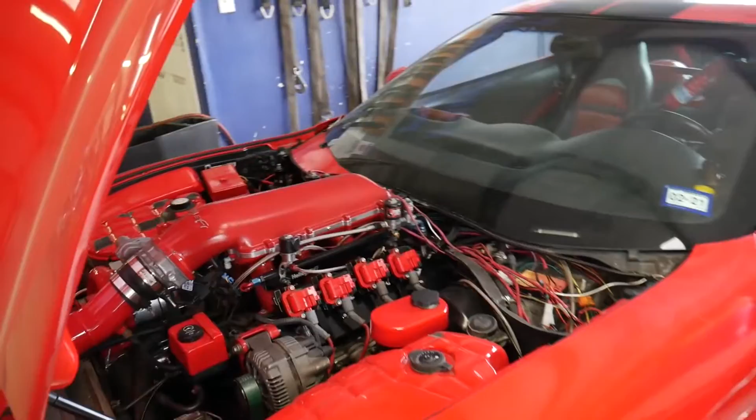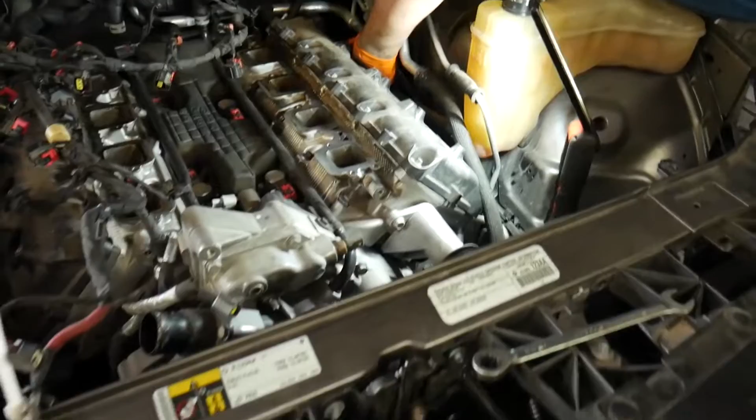That Charger RT, we're about to do a cam package on it. So as soon as it gets in here, I'll film that car and show you guys what kind of goodies it's getting. John's been making good progress on the cam install on the Hemi. Got the radiator out, intake off, just getting the valve covers off, and getting ready to pull the heads on this thing soon. Then we'll get the front cover off and get the old cam and lifters out of there and get ready to put in the new stuff.

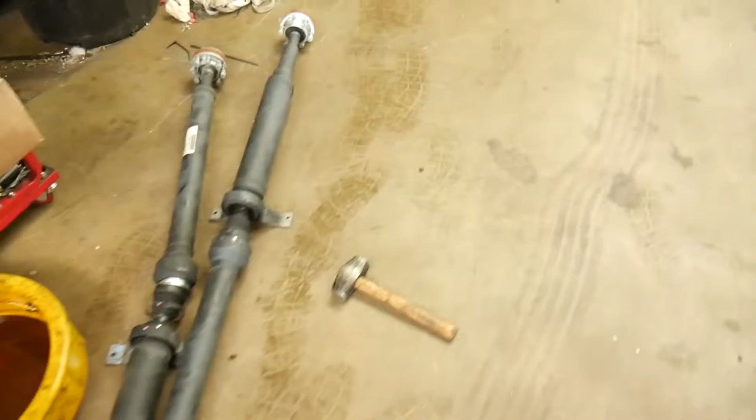Alright guys, the heads are off, the front cover's off, so we're at a good point for today. First thing in the morning, we're going to get the lifters out, get the new lifters in, get the cam out, get the new cam in, put our phaser limiter in, motor timed, get her all cleaned up, get the coolant out of places it don't need to be, get it all blown out, and get the valve springs put on the head and get this thing put back together.

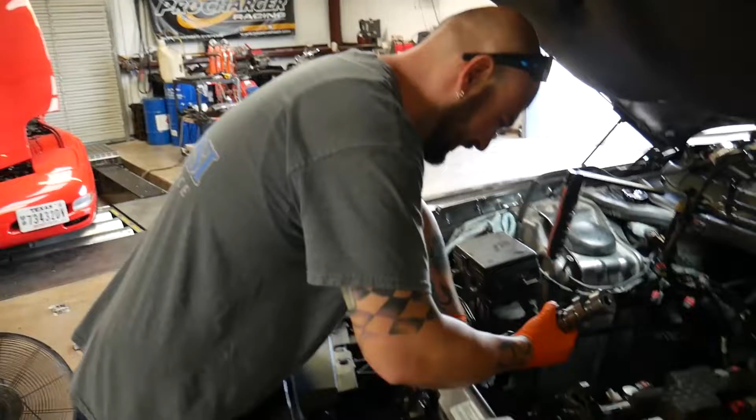You like the way I stroke the camshaft, John? Sometimes. Slide it in nice and even, nice and slow. You're pushing too hard - that's what she said. Sometimes.

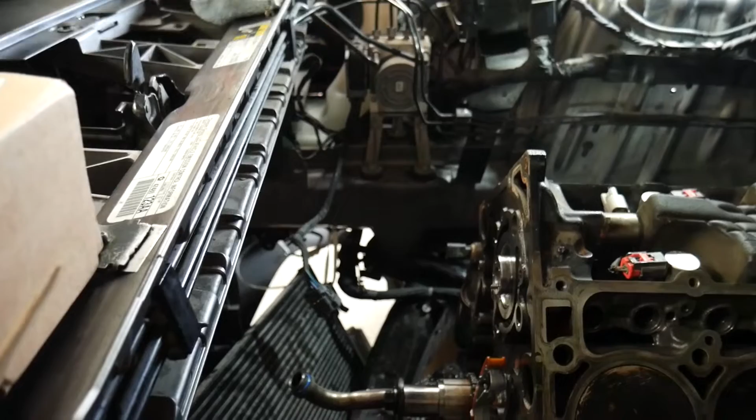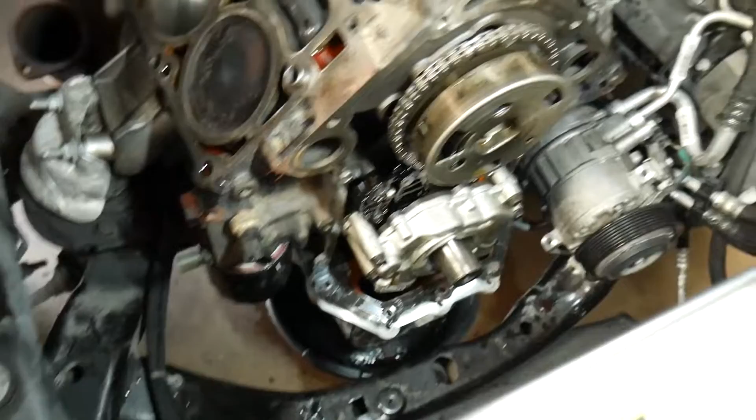So as you just seen, we put the cam in. We also got our new lifters in, and we got the motor timed. Oil pump back on, tensioner, all that jazz. So all that's good. All we got left to do is final cleanup, make sure all the bolt holes for the head bolts are clean. As of right now, the surfaces are clean, but the head bolts still got some coolant in them. So we're gonna get all those cleaned up, and then we'll slap the head gaskets on it and get these heads slapped back on it and start putting this joker back together.

So as you guys can see, the heads are back on. Sorry, I missed the shot for you guys. We went ahead and got the valve springs installed as well on the heads.

Once we get all the rest of the back stuff situated, we'll go ahead and get the intake on, get the coil packs on, and wrap up the front of the motor, get the radiator back in, and then tomorrow we'll hear this little 5.7 chop.

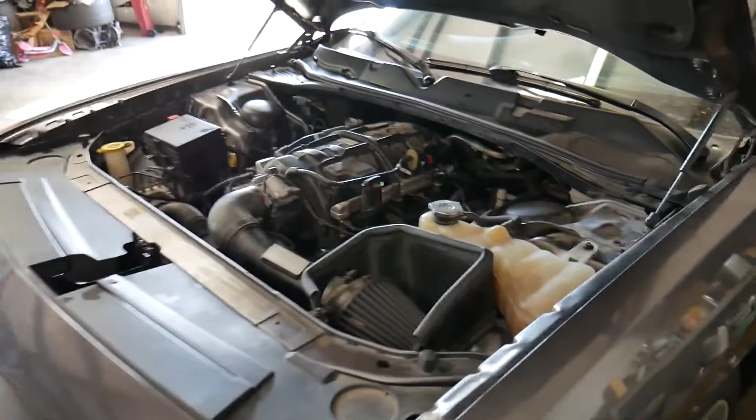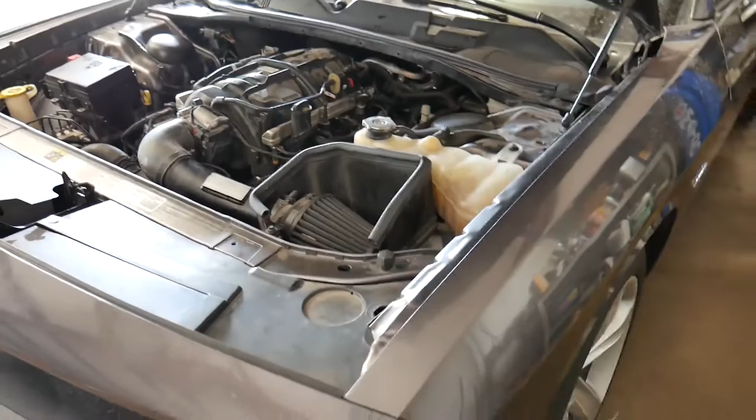So we've got the cam install finished up. We're gonna do the first fire up. I went ahead and got in the PCM and put a calibration in it. The only downfall, the shitty part, is the carrier bearing is going out on this car. So we're not even gonna risk it for the biscuit and put it on the dyno. We already contacted the customer and we're waiting to hear back from him, but most likely we'll be putting a drive shaft shop one-piece in it, or an OEM replacement. Who knows, we'll see here shortly, but let's go ahead and get the first fire up and see what this thing sounds like.

So as you guys heard, it's got a little chop to it, and it'll get a little bit more aggressive once we dial it in a little bit more, but I just threw a base map in it so we can get it fired up and get it out of the shop.

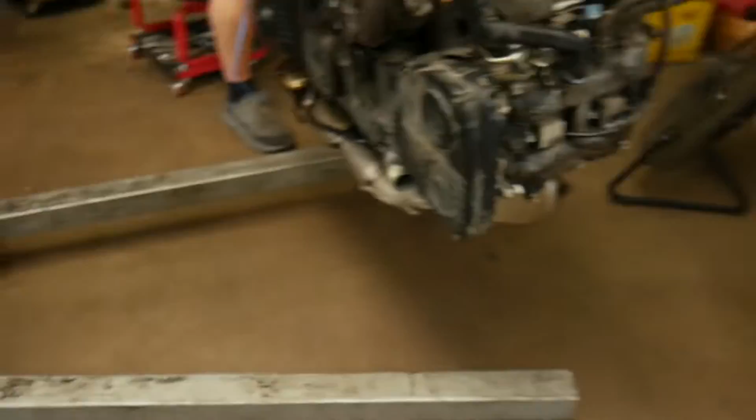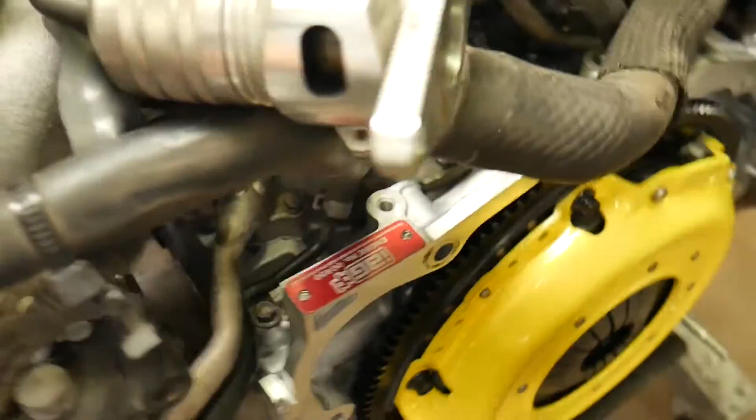So guys, we've been hard at it, and our Subaru build is finally ready to go back in. I didn't get a chance to do much filming, but John's got the Subaru motor ready to go back in. We got the new ACT clutch on there, that fresh IAG block. We went ahead and deleted the secondary air pumps as well, made some plates for that, but we're gonna go ahead and get this thing stuffed back in the chassis, get her put back together.

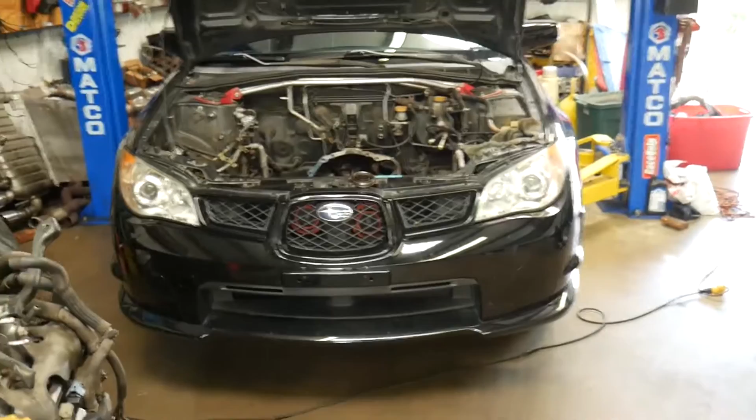So guys, on our cam install video, I think I'm gonna put, or as you've already seen, I put both these videos together, but we finally got the drive shaft shop drive shaft for this thing, 4 to 6 weeks later. This is the car that we put a cam in, and the carrier bearing on the factory drive shaft was no bueno, and on these cars you can't replace it. So we went ahead and talked to the customer about it and got an upgraded one-piece drive shaft put in this thing, and it came in yesterday, so we got it slapped in.

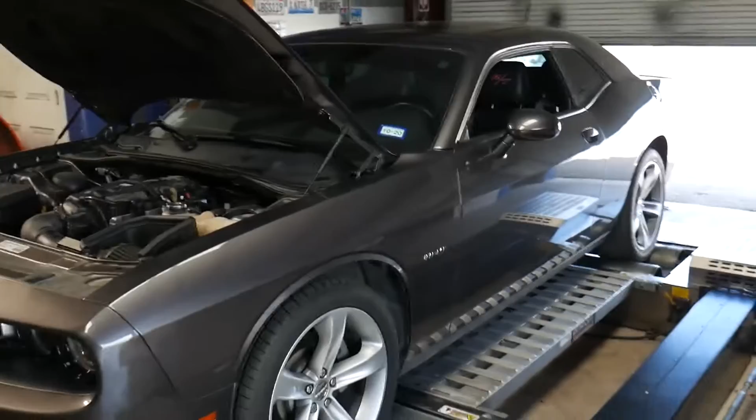So now we got this thing on the dyno. We'll go ahead and get this thing strapped down and get it tuned out and see what kind of power it makes.

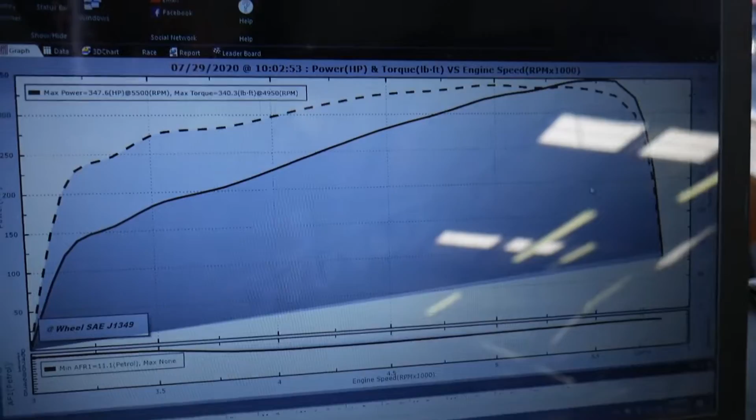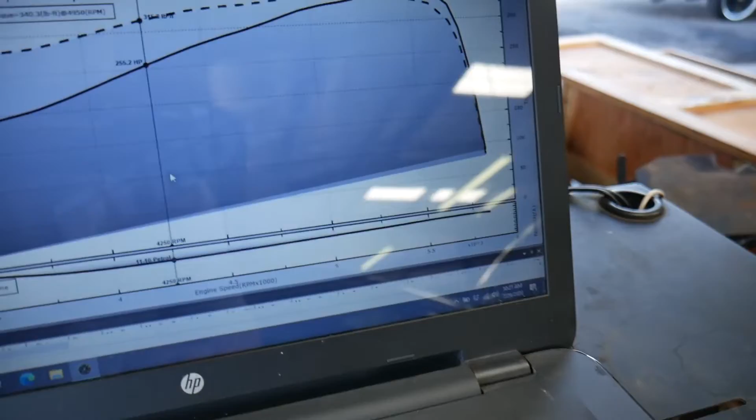Alright guys, so we got our first lick in there, and well, definitely that's a starting point. That first pull there was 347 horsepower and 340 foot-pounds of torque. And as you can see, we got quite a bit of work to do. The air fuel line's pretty flat, but she's definitely fat down here at the bottom. So we're gonna get these air fuels cleaned up and get some more things tidied up on her and see what kind of gains we make.

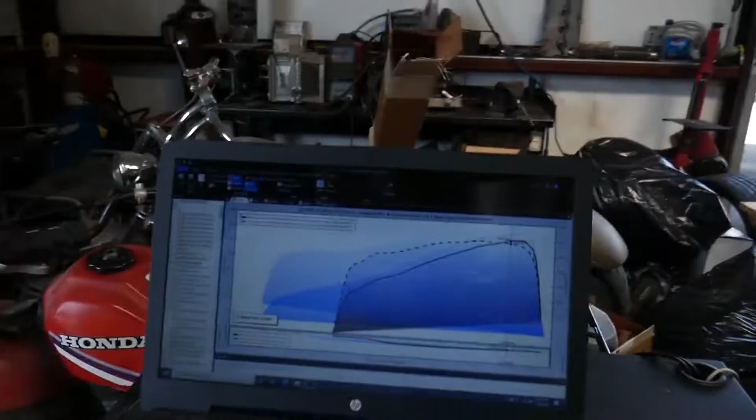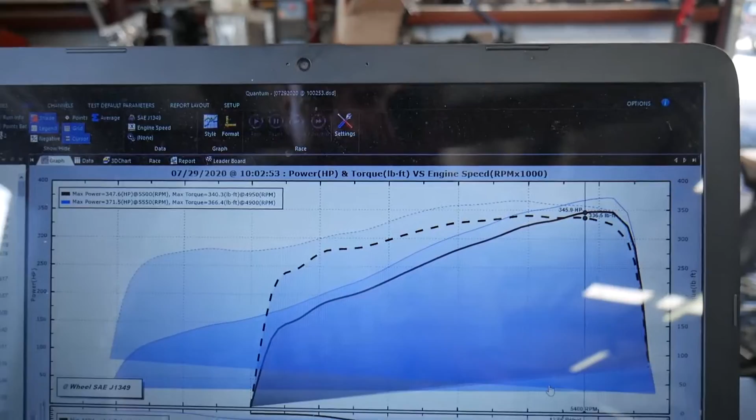Well, she liked it. She liked those changes for sure. So that second pull, 371 horsepower, 366 foot-pounds of torque, and you can see gains through the entire curve there. Let's get some out.

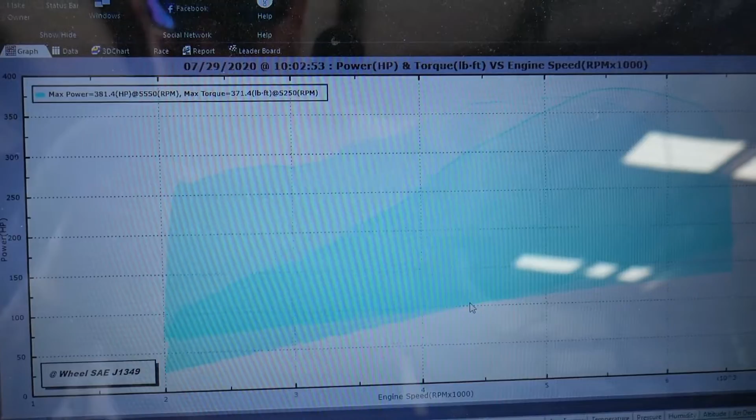Alright guys, that's our final tug on the 15 Challenger RT that we did the camshaft in. 381 horsepower and 371 foot-pounds of torque.

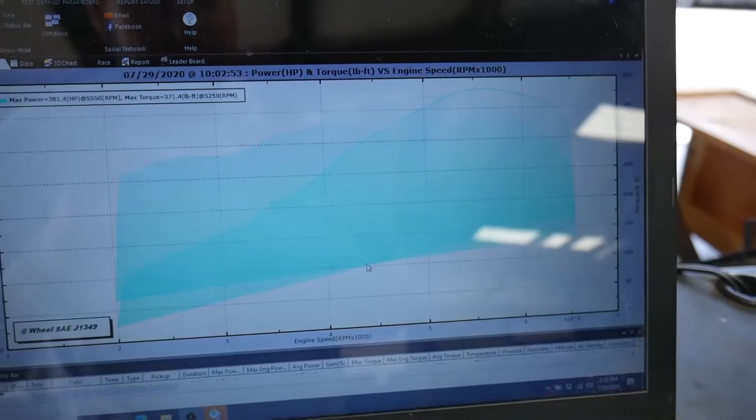Alright guys, let's take one more listen to this little cam Challenger. Sounding good. That's gonna wrap this one up for us.